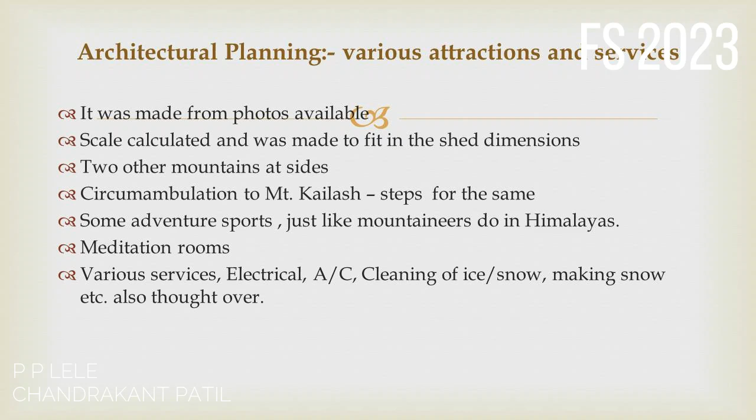Now, actually, while planning, the design was made from the photos and the scale calculated, as I have explained. There was a circumambulation, we call it pradakshina. Normally, when everyone visits Kailash, they take a pradakshina of the Kailash. So that provision is also made there, so if someone goes there with some religious intent, he can go around. Actually, the pradakshina is 52 kilometers around the Kailash. Yeah, he has studied Kailash very well. It is 52 kilometers around the Kailash we can walk. It will take about 10 days to complete one pradakshina.

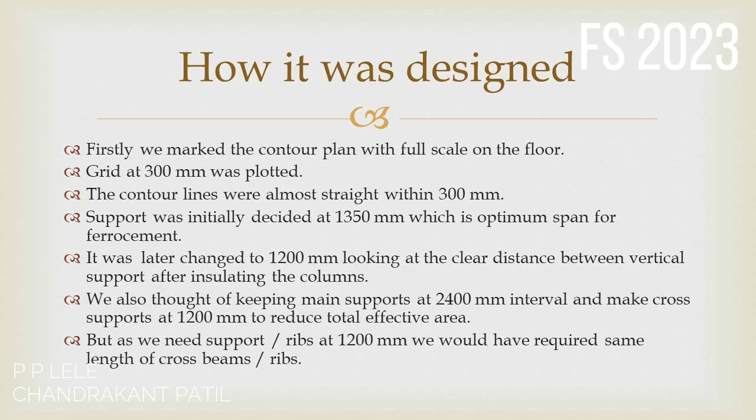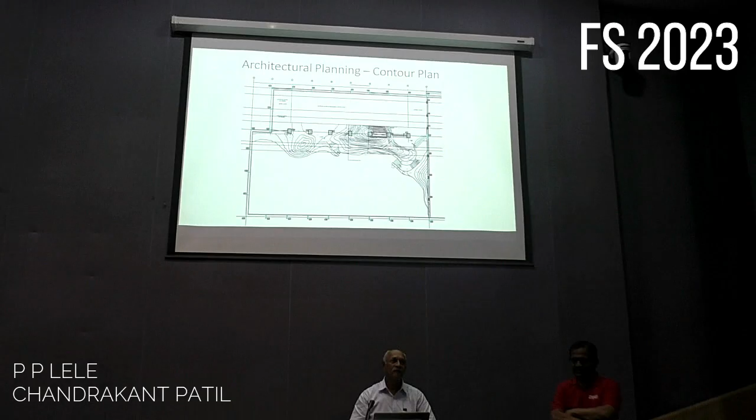So that concept also we have made in this. We have one staircase going up, and here you can see the parikrama around the Kailash. We climb the stairs, go in, there is a ramp here, and come down this way. That will be one pradakshina. How much distance? Here it is about 52 meters. And there actually it is 52 kilometers. This will be maybe 100 and 150 meters, taking all around.

So various services are also required in such a thing, because air conditioning is one of the most important services, because that temperature will be around -5 or -6 degrees. So they have built a shed first and it is insulated all around. And in one part of the shed they have made cold storage. The roof is also insulated, and one cold storage part is of -20 degree temperature. They store their strawberries there and they are using that.

Inside there will be meditation rooms also. Adventure sport, just now I explained to you. Below the Kailash there is much open space inside. So we are using it for meditation or any other purpose. Meditation rooms will be there below the Kailash.

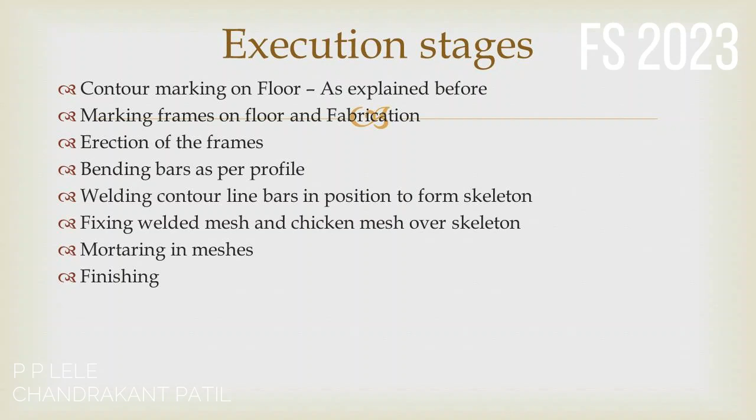AC and also cleaning of ice or snow is required. So some drains are provided in the flooring. We are buying a brooming machine that will be brooming in the night. The ice which gets dirty in the daytime will be broomed in the night, so the next day it will be fresh.

And they have also brought snow making machines. We will be having 3 snow making machines there. So we will make snow at a spot. Even on Kailash we are going to have near about 300 mm thickness of ice. So that load is also considered in the design.

Now ferrocement design and planning comes into the picture. There were some requirements and constraints for the design. Shape, as you have seen, shape is important. Just erecting any mountain is not desirable. The shape has to be exactly as per the photograph. It should look like that same photograph. That was the most important requirement. Structurally, it has to be safe because people will be going around. So it has to be safe.

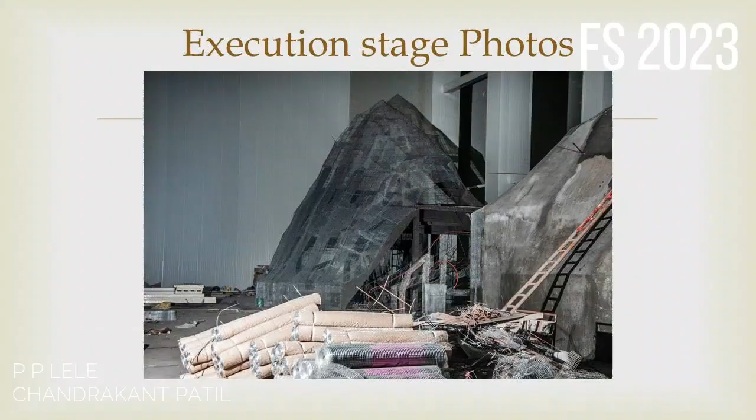Space below has to be utilized. Otherwise, it would have been very easy: just make a mountain of masonry or stone and bring the shape. But it is not the case. That space below should be utilizable. And one more constraint is there because they had done the flooring, and below the flooring they have run some pipes. Yeah, we are having PEX pipes inside the floor to run glycol, which keeps the floor cool. That is the main thing, we can't disturb those pipes.

The PEX pipes are of 12 mm diameter, we will be running the glycol liquid through the pipes because glycol liquid keeps the floor cool. Ethylene glycol? Ethylene glycol, right. So because of that we can't drill anything in the floor. Above that we have made one raft of 200 mm thickness, with reinforcement on both sides. And on that reinforcement we have built the structure without any puncturing.

How much is the temperature outside? Pardon? Temperature outside the glycol tubes, or in the floor? It will be minus 20 degrees. Minus 20. Yes, glycol freezes at minus 13. Minus 13. So we had a limitation. We cannot drill the hole deep inside, maximum 50 or 60 mm. He said that you cannot drill the hole more than that. So that constraint was also there.

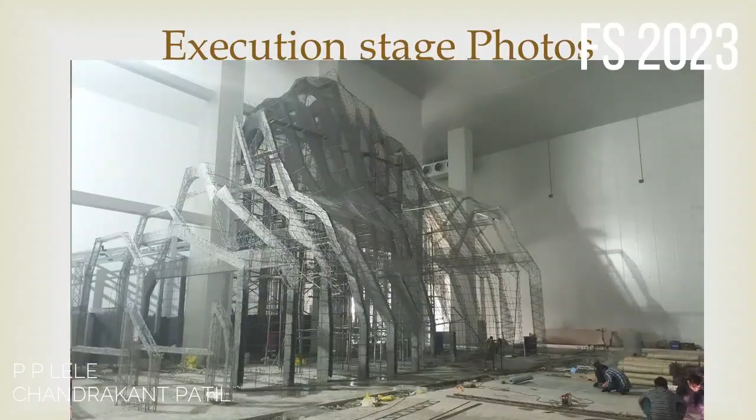So our structure has to be self-standing. That was a requirement. They have erected the structure, but we cannot take the support of that structure for the shape. So it has to be self-standing. That was another requirement.

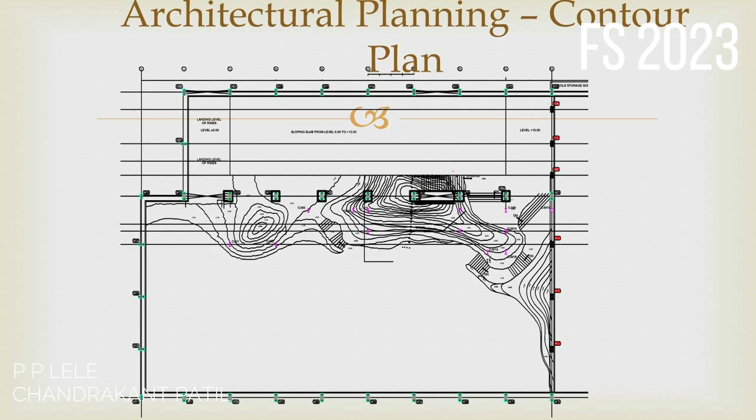Then how was it designed? Firstly, we marked all the contours on the floor at full scale, the required scale, because it was 14 meters high and 50 meters long or something like that. So all the contours were marked on the floor. We marked a grid of 300 mm by 300 mm. When all the contours were marked, I found that within 300 mm, contour lines are straight. So it is clear that if we make straight lines between 300 mm, we will get the exact form of the contours. So we decided to go that way.

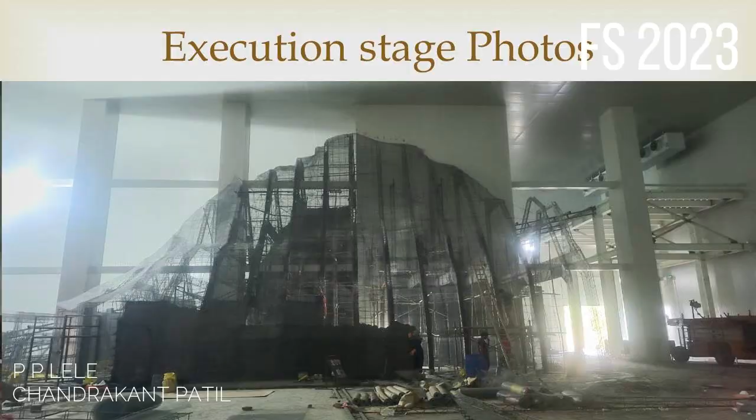Initially, a supporting structure is required. We cannot just make a ferrocement slab or wall of 30-40 mm thickness and give the shape. It is not possible. So a supporting structure has to be there, because the widthwise span was also about 15 meters or so. So naturally two walls were spaced 15 meters apart, and that 15 meter span is much more. And the shape of the wall is also not straight or inclined. A plane surface is not there; all the undulations were there.

So initially we decided that we will keep the framing support at 1350 mm spacing, because that is the optimum span for ferrocement. If the span is more, then we have to increase the thickness. And for 30 to 40 mm thickness, 1350 mm is okay. There will not be cracking or bending, anything like that. But later on we changed to 1200 mm because of the vertical supports that were there.

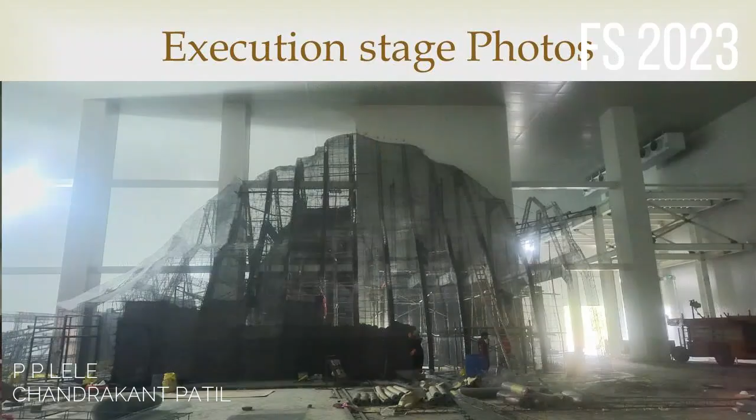And in between the space, in between the two supports, 1200 mm was equally dividable. So that's why we made it 1200 mm. We also thought of keeping the main support at 2400 mm to avoid vertical supports in between. But later on, we came to know that if we keep it 2400, we will need support at 1200 mm. Then cross beams will be there. So there will not be any saving.

Again, for design purpose, we have to draw the section in both the directions to work it out. So that idea was kept apart and we made the frames at 1200 mm center to center. Now section, as already explained, we get the section from that contour plan at 1200 mm, and every section was drawn on the drawing. For every section a drawing was made.

Vertical supports were provided at the ends only because the space below should be utilizable. So there are very minimal vertical supports in between. Practically there is no vertical support in between. All the supports are at the end only. If an inclined and irregular surface is there, we have to tie opposite ends. So we provided tie beams connecting opposite ends at certain intervals.

At bottom also we provided a small tie beam because otherwise the two ends will go apart. So a tie beam is necessary, and anchorage in the flooring was not possible. That's why we provided a small tie beam with some minimum inserts in the floor, which makes the depth of the tie beam minimum. Do you have pictures?

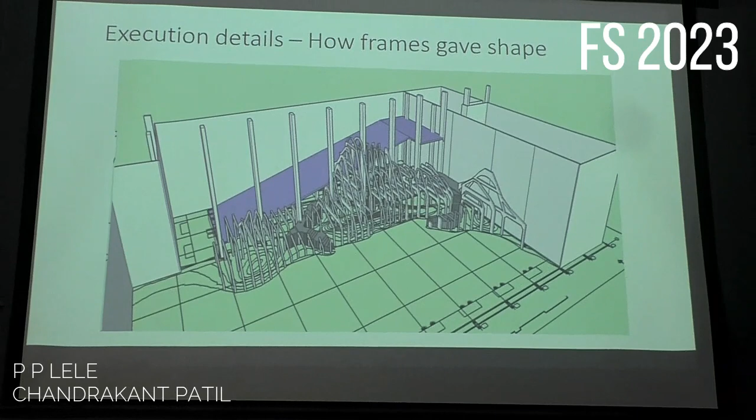If you join the tops of the frames, that will give the shape of that mountain. That's how we made the frames, planned accordingly.

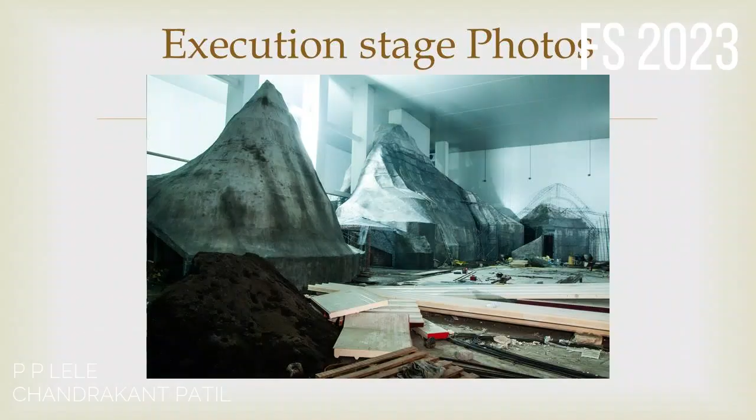This shape we have almost achieved. You can have a look tomorrow. This is the shape we initially had in mind, and after erection. Pardon? This is only on this axis. How about this axis? No, that is actually the backside. Backside, actually, as you have seen in the photo, there is a ramp.

Okay. No, actually, for the snow park on the opposite side, we have made one slope ride for the visitors. Here you can see. There are some sloping rides behind. Achha, skating. This is the north elevation, which looks like the original Kailash.

Only that we have faced from this side. The back side we have not done much, because everything is required in one place: snow park and adventures and everything, and also Kailash. That's why only that portion is used. Only the elevation purpose is finished. Yeah, elevation point, and some side elevation also, partially.

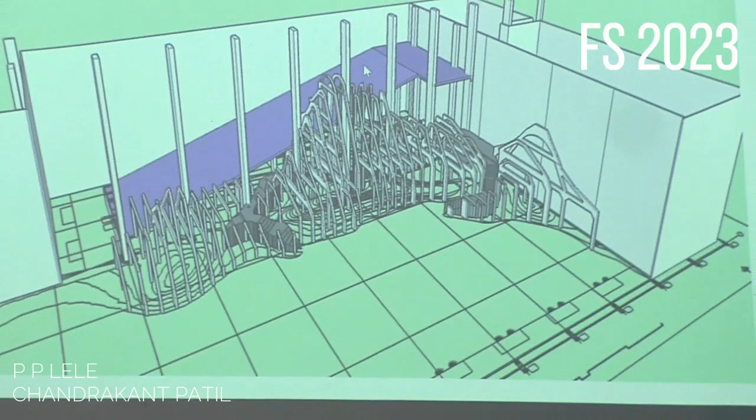Here you can see that there is a ramp. Ramp, back side. And here, these steps are going up. Actually, later on we matched these steps with the ramp. People will climb up from this step over the ramp. From here, they will come down. This portion was redesigned later on, and they are coming down from these steps.

And some adventure sport will be there. Yeah. They will be climbing from this way, going to this. There will be a Burma bridge in between that highest rib and that sloping slab. There will be a Burma bridge in between. That is for some adventure sport. That portion was later redesigned, and we are working on it now.

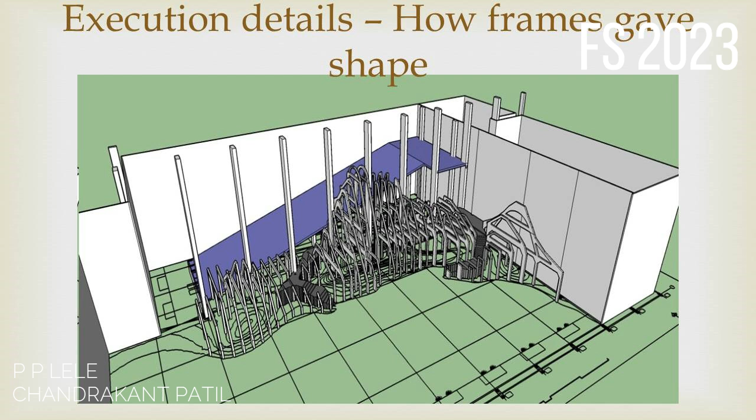Yeah. Have you thought of physically challenged people also? No, physically challenged people cannot climb this, cannot go in. But ramp and all these things? Yeah, that we have taken care of. We are putting an escalator for them to go up. Grandchildren are playing, grandfather wants to just go around and do pradakshina. That may be possible, depends.

The bottom is a column. Yes. This is the vertical part. It is like a column, acting as a column. We are about 400 mm width. Okay. Very nice. Good.

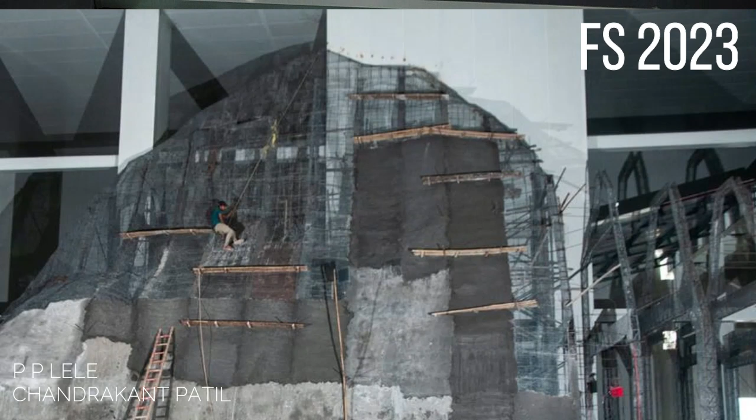Now this is mortaring, you can see it here. Mortaring work is going on. And you can judge the scale because you can see a person standing here. And this is a 20 feet ladder, and you can judge the scale. Yes, yes. Press filling from both sides or single? Both sides. No, press filling actually,

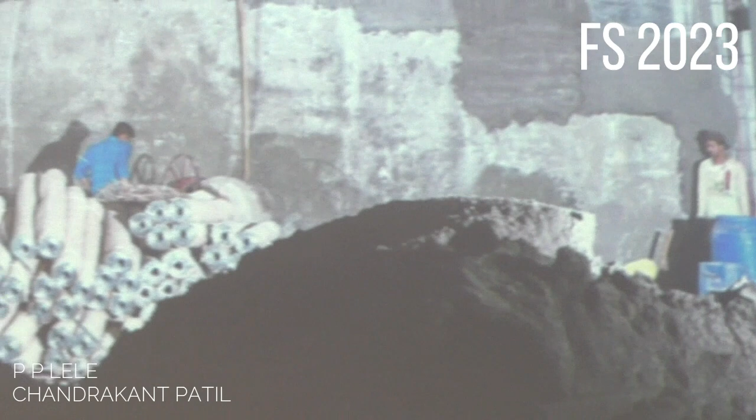everyone was telling that there is no need of shuttering for the ferrocement. But personally, in my opinion, when we insist on the specific surface, the bond between the meshes and mortar has to be perfect because we count on it. If we press it from one side only, even though mortar comes out from the other side, it is thought that there is no need of pressing it more.

But I tried here, I fixed 3 mm ply on the bottom. I tied it to the meshes because the shape is confirmed and the shape is not disturbed. So after tying that plywood from below, I initially finished that surface with press filling as we normally do. Then I used a needle vibrator with a 25 mm needle.

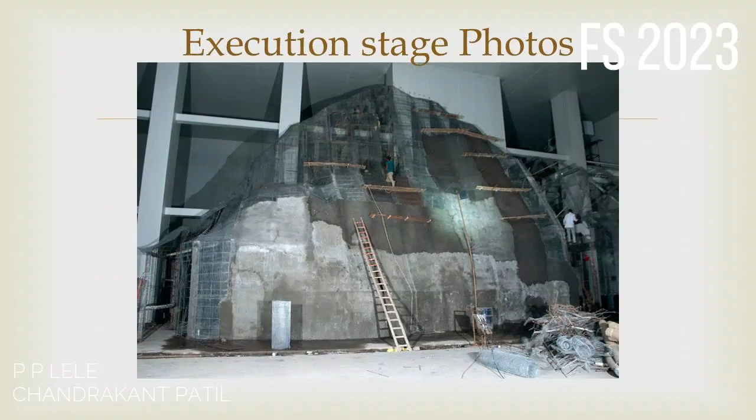And then I observed that the mortar goes down. That means there are some voids in between. That's why it is going down. And cement water is coming out later on also. So that is an area for study. Many academicians can study why it goes down, and the properties with press filling by hand and with a vibrator. What is the difference? You can research it, and I will be happy if I get the feedback.

Basically, if we use plywood from below, the cost increase is not much. On the other hand, we can save finishing labor on the other side. That may be making the cost the same. So practicing people can think over it and use this practice. By the way, it is not included in the IS code. What is not included? This use of shuttering. It is not included in the IS code. IS code is silent over it.

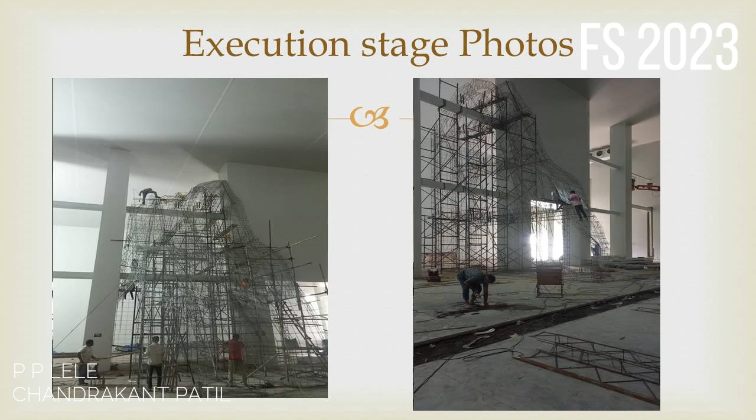So this is another mountain. You can see in another picture that second mountain. It is not Kailash, but in the Kailash range. That is, I think, imaginary or something like that. Yes. It is imaginary because in the Himalayas you will always find a link of mountain peaks. A mountain range is there, small and bigger peaks like that.

This is another view as the work is going ahead. Actually it was difficult to take photographs there because it is in an enclosed shed, so the light is very low. So I brought the photographer and he came with some floodlights and everything. The actual picture we can see tomorrow. Yeah. Tomorrow you can see the actual picture of it.

MAPRO is inviting all to come. So we'll take a review of tomorrow's tour also. Yeah. Number is to be decided.